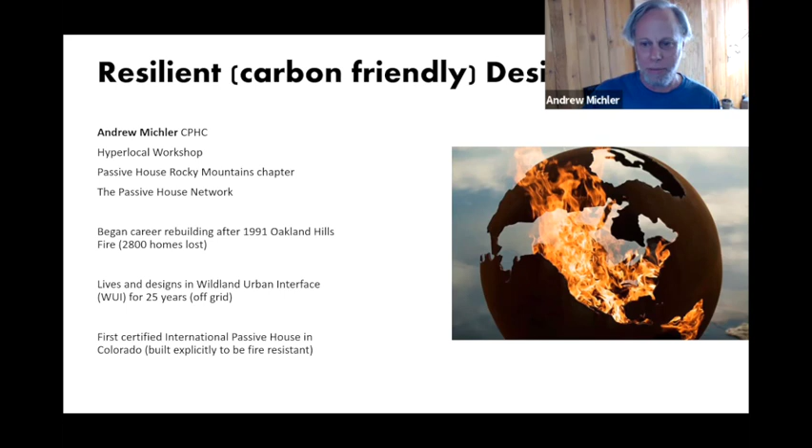Yeah, I do live here. I've been here in Colorado for maybe 26 years, 27 years. I've been off grid for 25 years. And I live out in the foothills, the wildland urban interface, off grid, in Ponderosa Pine Forest. I've been thinking about fire resilience pretty much since 1991 when my family's house burned and we went to refurbish a used house, an existing property. That's when I first learned about building and how important it is, and I've been interested ever since, especially on the fire resilience side.

So tonight I want to start off a little bit about what carbon in buildings is as a reference point to a lot of the conversation we're going to have. This is not an isolated event, this fire, and in fact, Cameron Peak fire came creeping right up to the edge of my property a couple of summers ago, and we're going to see this over and over again. So we really have to think about the built environment in interaction with the greater environment, so to speak. I'll get into Firewise design, which is the main topic tonight, and then talk more about resilience and passive house and how we need to talk about building as a system rather than just as components when we talk about building in 21st century conditions.

And as you probably know by now, Xcel Energy is offering pretty generous rebates for higher performance buildings over code. I'll focus mostly on passive house because that's what I know best. And that also integrates best with this Firewise or resilience context.

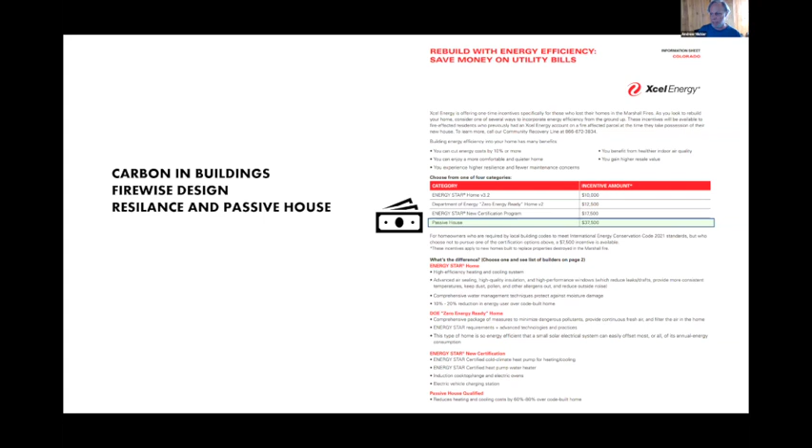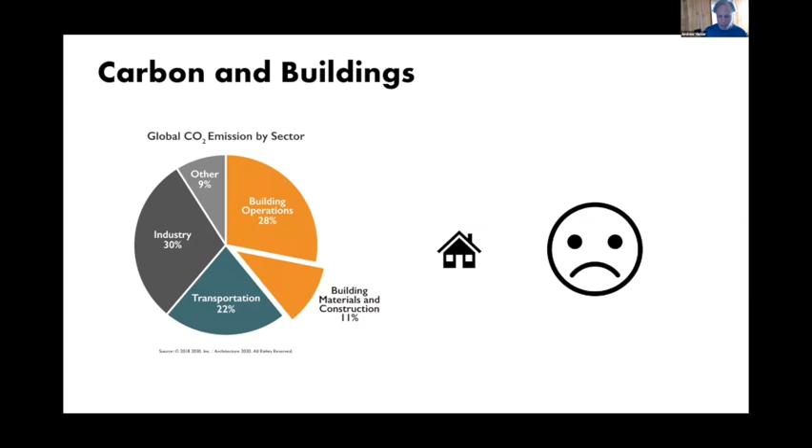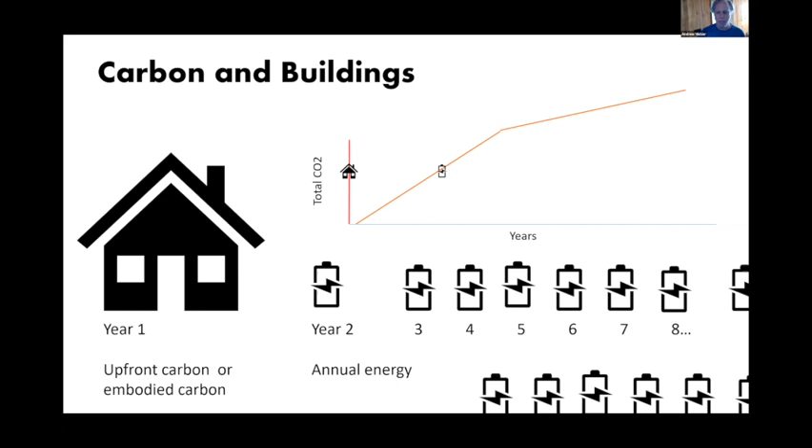And just as a frame of reference on what that means, year one is when most of what we call embodied energy for a building takes place, in the materiality of the construction. And then over the years is when the operational energy, the carbon input, comes from. So even as our grid gets cleaner, it's still a slow transition, a slow ramp to hopefully a zero carbon or low carbon energy infrastructure, but that's going to be generations away, unfortunately. So our main focus now is on the energy side of buildings from that perspective.

So first thing we look at is eliminating fossil fuels on site and then reducing demand for energy in general. That starts with the high performance building envelope. And then reducing demand for methane gas or natural gas upstream, which means we're still using power, but we're using less of it when it's produced by what we call peaker plants or natural gas fed plants.

The all electric home means that heating, cooling, hot water, and even cooking is going to be all electric. And the technologies now are here that are fantastic and are highly subsidized as well by the utilities. Roofs are oriented or built for PV, and you're now thinking about not just use of the building itself, but car charging as that becomes electrified.

But we're building neighborhoods. We should think of our cities or neighborhoods not as giant solar plants, but also as accessible, green, biodiverse living places. So we don't want just to build giant flat roofs for PV. We really want to create more compact housing that can include a diverse, biodiverse environment.

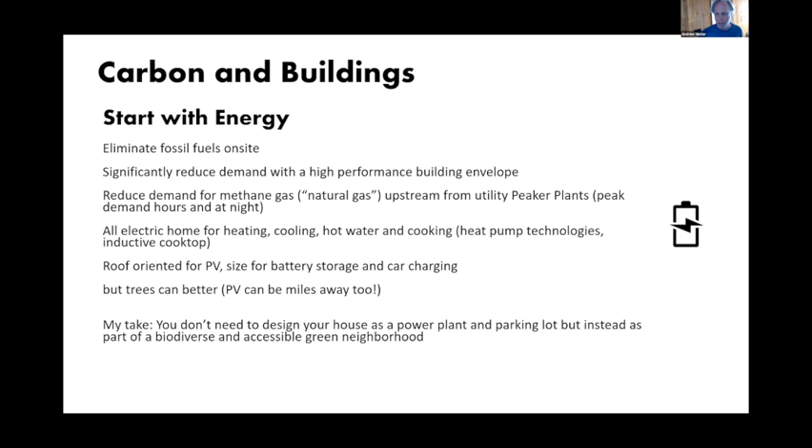In terms of the Firewise home, the interesting perspective I found on this website, Wildfire Today, was that researchers discovered that homes built in 2008 or newer are about 16 percentage points or 40% less likely to be destroyed than 1990 homes experiencing identical wildfire exposure. And that has to do with the change in code over time in specific regions in the country.

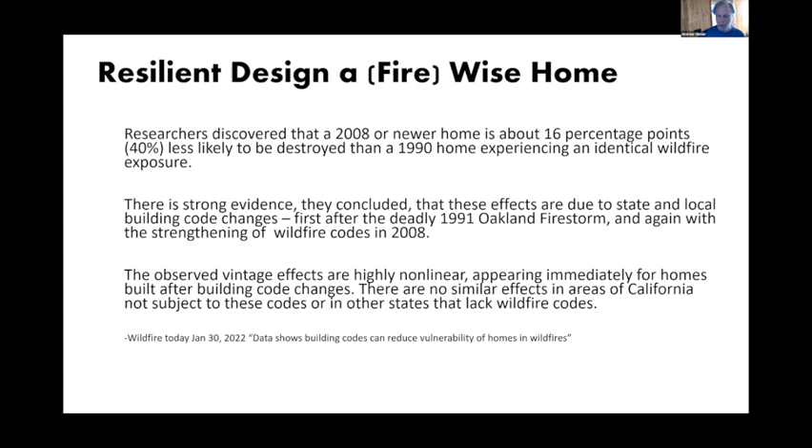I'll talk a little bit about that, but also we should be certainly advocating or looking at the conclusive evidence that fire resilient design is extremely effective and not necessarily more costly than traditional code buildings. And I'll tell you why: exterior fire events are typically not well considered in code.

Usually, just for fire resilience, we're looking at maybe a 5/8 inch drywall between the house and garage, so if there's a fire in the garage, it protects the house. Unfortunately, insulation is usually not fire rated, or not particularly strongly fire rated in the type of insulation you can choose. Smoke alarms, firewall blocking between floors is pretty typical. And now we're seeing often a Class A fire roof used in a lot of areas.

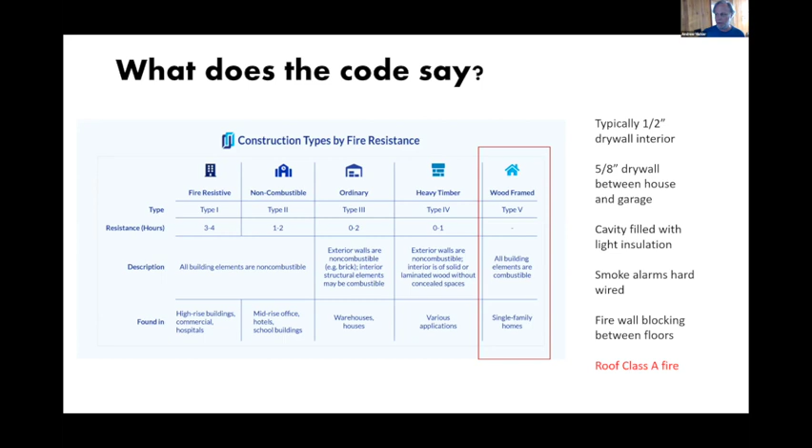But typically, when we're looking at light framed wood construction or single family residential, fire is not a particularly high consideration for code compliance. So it's pretty much on our own how we want to think about how to create fire resilient homes in the future at this point.

And I used this analogy before with the help of Johnny, and I'm going to reuse it again: the idea of thinking like a log. I'm sure most of you have tried to start a campfire or a wood stove fire, and you know the first rule is you don't just throw a log in and put a lighter to it. Usually you start with kindling, and then you build up to the log. Part of that is because of something called the surface area of the materials. It's much easier to start when you have lots more surface area on a given object.

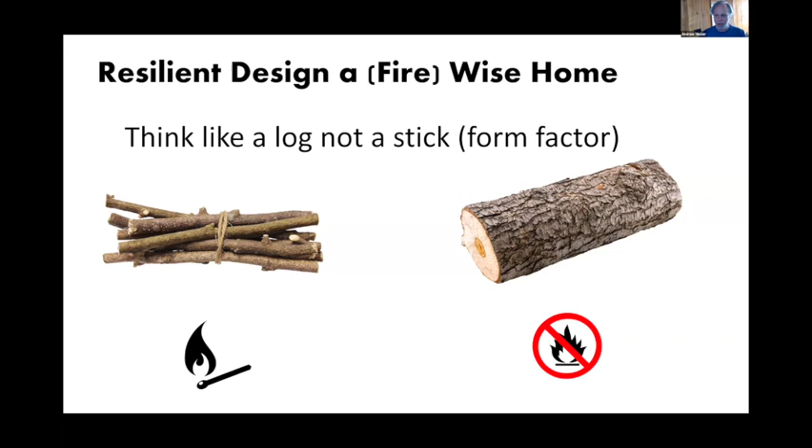So that means we start the design considerations with buildings with a more simplified design. And that includes porches, the vernacularisms of the building as far as portals or corners. All sorts of things can lead to increasing the fire exposure of the building. So simplifying that form greatly improves its fire resilience.

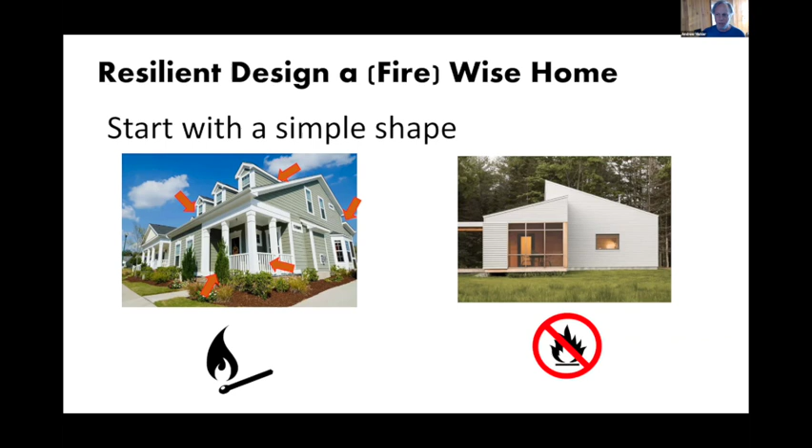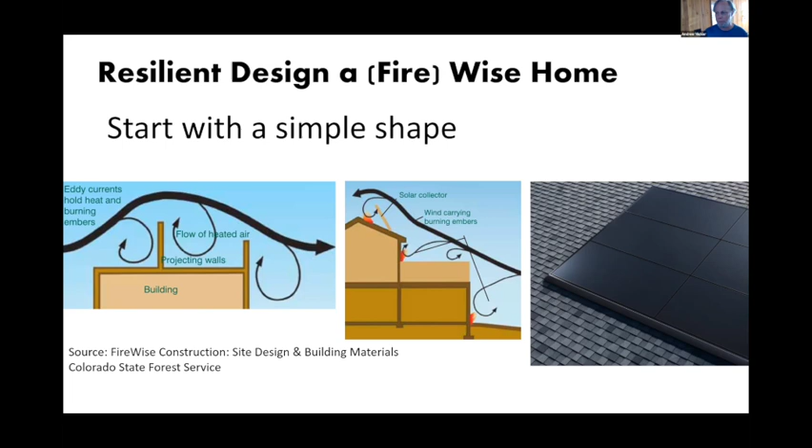And then very broadly, removing materials around the house that can lead fire directly to the structure. Wooden decks, unfortunately; in Colorado, we love to live outside. Wooden decks are a perfect way for a fire to really capture underneath the deck, on top of the deck, and then transition right into the house.

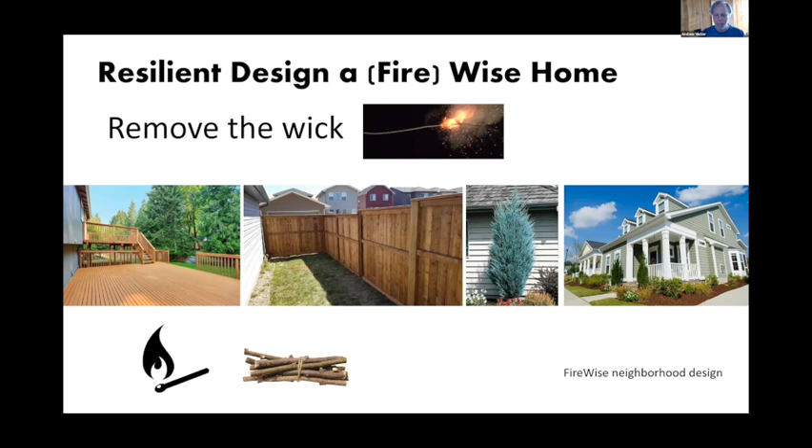Wood fences, landscaping, again, porches, all sorts of little detailing around a house that's combustible. So we call that the home ignition zone. And this is more of a WUI, wildland urban interface kind of construct.

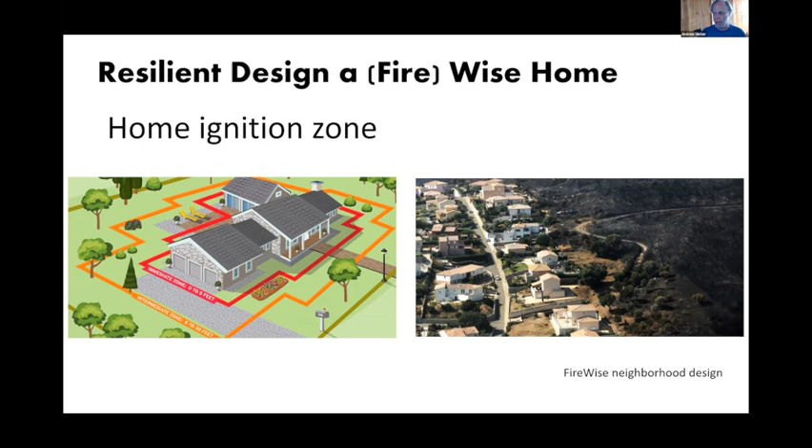This means fire landscaping. The first few feet of your house are most susceptible for fire to start, so hardscaping that, or putting in plantings that won't support fire, is important. Landscaping becomes critical within the next 5 to 10 feet, even 15 feet away, in a fire event. That's something you want to be doing—selective planting, keeping grass well kept, cutting it when it's dry, and having good overall design at the interface between the greater area around you and your dwelling.

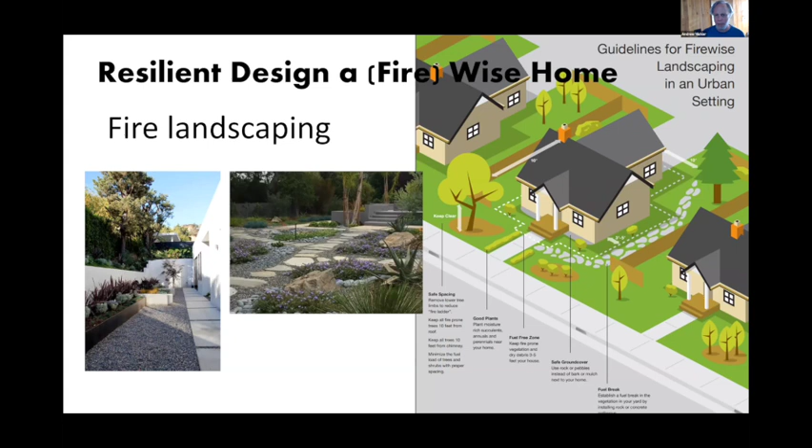When it comes to the dwelling itself, mind the gaps. Often the first thing that comes with fires is the ember front, and those embers are pretty sneaky—they'll go wherever the wind blows, which can get into places like eaves or unprotected crawl spaces. So the first place we look to within the building itself is protecting eaves. Unfortunately, code hasn't been helpful for eave design at this point. We advocate for a fully insulated or fully encapsulated roofing system to eliminate the possibility of hot air and embers getting in. There are other issues if it's not properly detailed, like moisture control, but in the case of fire, eave design is the first place we look.

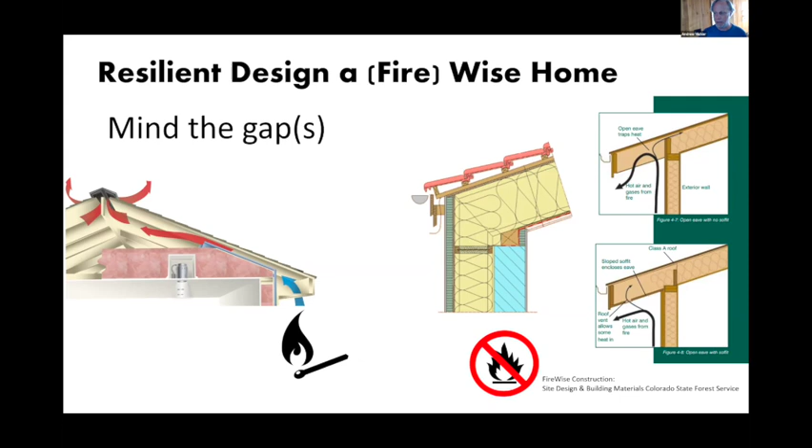Then windows—the second thing that comes is the large heat front. We've seen this in the mountains over and over, where people build a concrete house or a real fire resilient structure, but the windows were the first thing to go in a fire front. High radiant heat can expand the glass and crack it. I've heard numbers like 3 to 5 minutes of high heat can crack a single pane of glass, so once you have two panes, your house is essentially open to the entire outside environment with a completely unprotected interior. We're looking at triple pane glass, which is also 3-way tempered, typically much higher performing in a fire event than double pane glass. That also includes how the frame is built—tempered glass with an aluminum frame on the exterior can stay more rigid than, say, a vinyl frame.

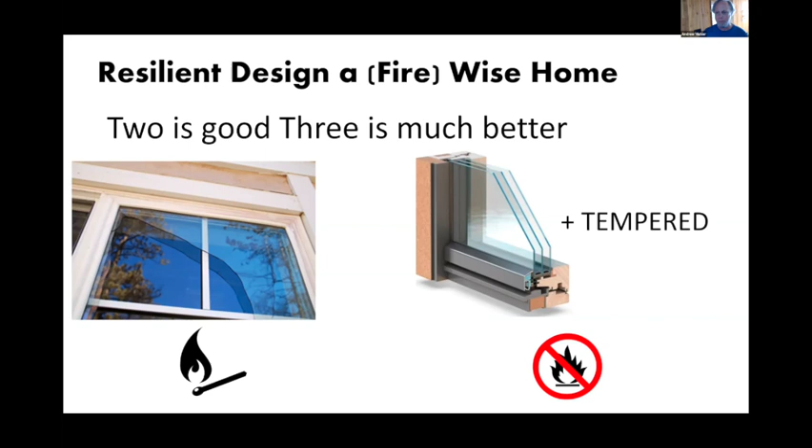Once the fire is around the house, having fire resilient materials is critical. Sadly, it kind of breaks my heart that wood exteriors are becoming less prominent out here in the West, because you can imagine how easy it is to start a cedar shake wood siding on fire. You certainly can't do it on your roof, but even wood can withstand radiant heat quite well—it just can't stand direct heat or flames very well. The good news is there are a ton of options now, either mimicking wood or other vernaculars, maybe more modern or traditional, or a mix. We have a good variety of Class A materials, from steel roofs to stuccos, brick, and fiber cement. Cement boards are becoming quite popular, and there are even architectural cement boards that look quite modern, not like a traditional lap, plus stones and other options. When redesigning a house, there's a great experience in discovering these materials, and the cost effectiveness is pretty good now, especially with fiber cement products.

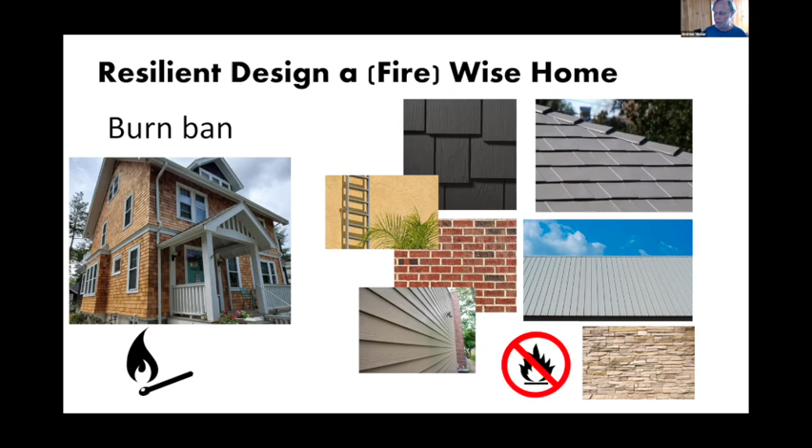But it's more than skin deep—we should look at how the walls are assembled as well. This means starting with foam. Foam, even with what they call fire resilient agents in them, still tends to burn extremely well.

Spray foams and board foams are used ubiquitously, both in normal code-built houses and quote-unquote high performance houses. So we're looking at eliminating them within the building structure.

Unfortunately, fiberglass is the most popular of all insulation materials, but it's typically quite airy. It lets air through the material itself. So it doesn't take much to get a fire going inside of a cavity with fiberglass insulation, and for it to spread as a result.

So the two more preferred measures to look at are mineral wool board and mineral wool batt, which is becoming much more mainstream now. Mineral wool is very popular because it has a high R value per inch relative to fiberglass, but it's also extremely fire resilient, almost to the point of being fireproof.

And surprisingly, cellulose insulation, which is a recycled paper product, what that does is called dense packed. So it doesn't allow air through the cavity, and also has a fire retardant that can smolder but doesn't support flame.

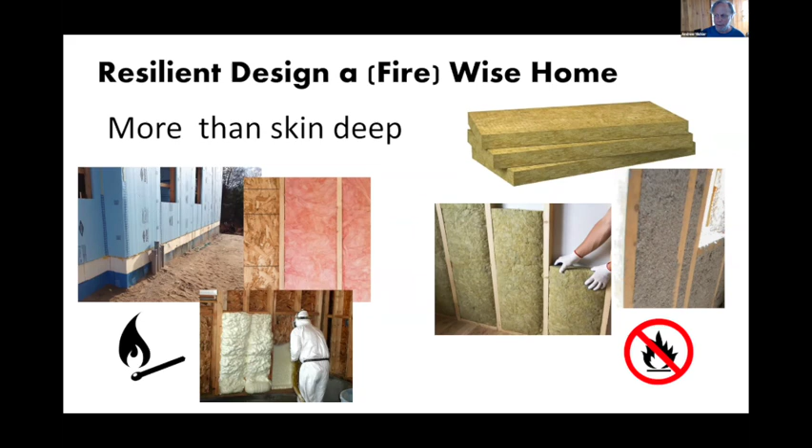So I'll go quickly into my own house as an example of what a highly fire resilient assembly might look like. And I'm going to start from the outside in.

Even though it looks like wood, this is just Hardie Board brand material, so this is fiber cement. There's a little bit of wood accent right there. I threw some rock out in front—I should definitely trim the grass—but that first barrier is to keep fire embers from having any place to perch, and for very little material to actually be able to burn.

Underneath that, of course, I have steel in the back of the house as well. Underneath that is a mineral wool board, and that's the exterior insulation material. 2.5 inches of that makes a completely fireproof boundary zone, essentially, for any fire that catches right next to the house.

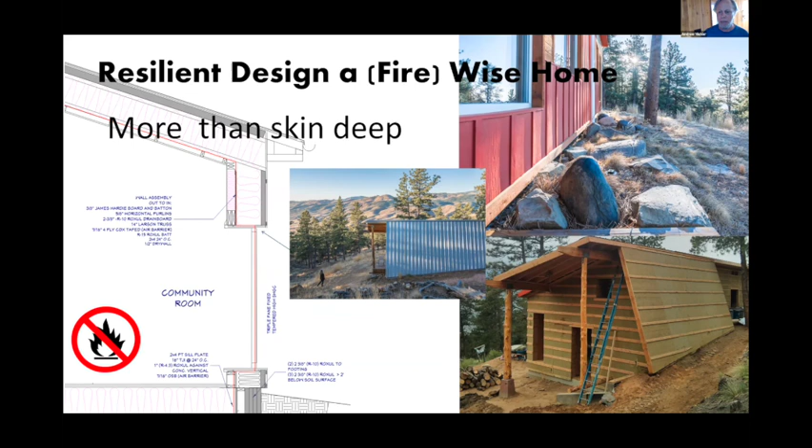Inside of that is a substantial amount of cellulose insulation, and then a structural wall, which has a mineral wool batt in it. So this is a very fire resilient assembly, and then the triple windows, and then protected frames for the windows.

So that's my particular approach that I took for my house, and there's lots of different ways to look at assemblies.

I wanted to also emphasize that when we look at the idea of resilient design, we also want to talk about surviving fire events, even if they don't necessarily go right up to our doorstep, but the air quality issues and especially smoke issues, which can be a substantial problem both for health and essentially contaminating the house to the point where it's unlivable, as unfortunately a lot of people have found out.

So we're also looking at the idea of air pollutants in general. Ozone, as you unfortunately probably know, Colorado's ozone levels have been defined as extreme last summer, and it's not getting better unfortunately. We're seeing a lot of smoke from just the west, from fire events all the way from Canada, Vancouver, all the way to Southern California, zeroing in right into the Front Range here.

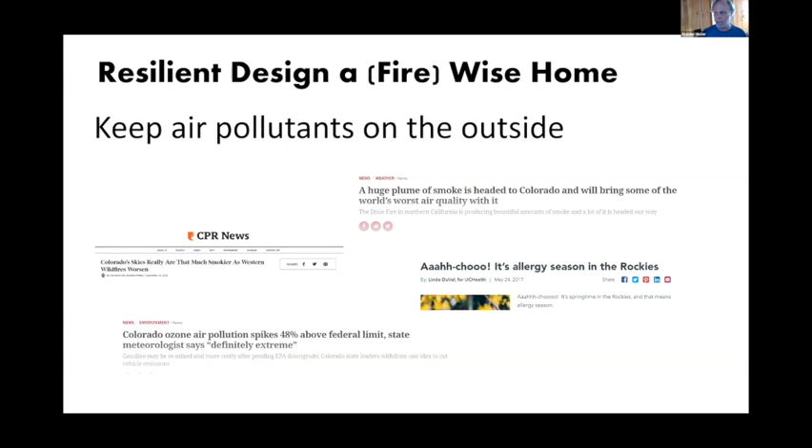So we're seeing this as a very typical event, air pollution on the exterior being a condition for resilient design. That means we need to look at, best case scenario, the building envelope as an airtight envelope. Right now code has buildings typically at 3 air changes per hour, tested using what we call a blower door. But we want to be actually a lot more airtight than that—that's completely insufficient for keeping pollutants out. I'll show you a graph of why that is.

So we'd like to look at dedicated air barriers within the building itself, and this goes hand in hand with some other aspects which I'll get into later. Once you get a very tight building envelope, you're going to want to look at a dedicated ventilation, fresh air system. So we're taking this 'build it tight and ventilate right' concept to its logical conclusion.

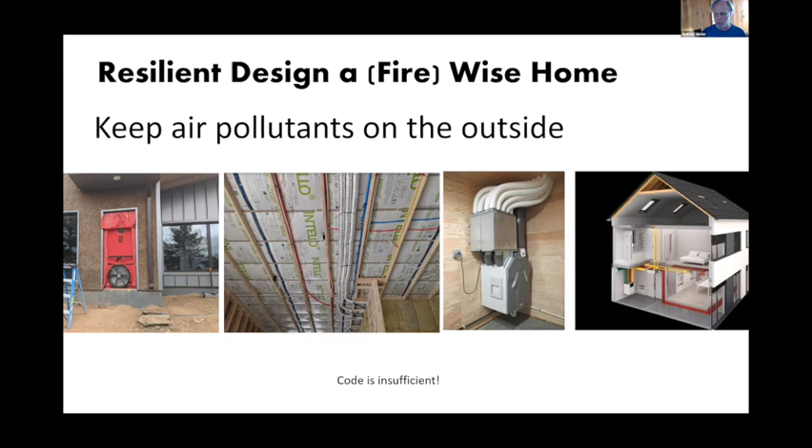As we know, in Australia's Victoria area, they've been going through extreme bushfires in the past few years, and a lot of homes have burned. So they're looking more and more at adaptive design for fire resilient conditions, and they found out that passive house airtightness is one of the key ingredients now that they're recommending for fire resilient buildings.

There's a lot of other detailing that they're taking into account that's more of a wildfire condition in a backcountry environment, but the airtightness is kind of a universal for all of us now.

And that's going to jump into me getting a little into more of the passive house side. I've been thinking and working in passive house for a long time, so I use that pretty much as a reference. And I'm using the reference in this talk that we need to look at buildings as systems and not as individual components. Components don't necessarily add up to a totally resilient building condition. So using passive house methodologies is a framework to look at the idea of resilience as a system.

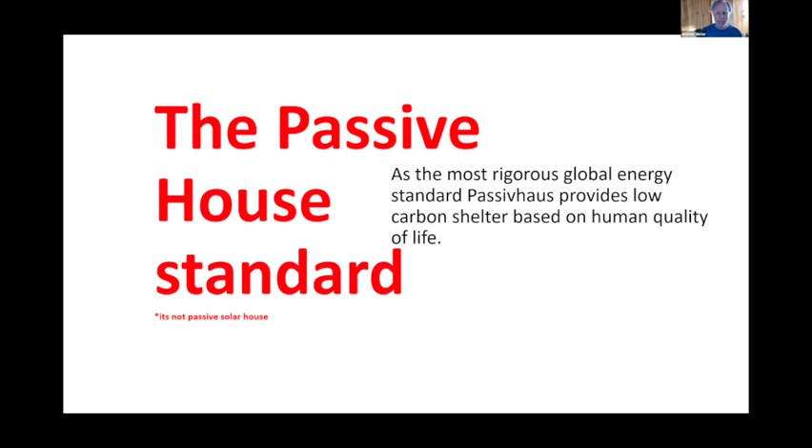In terms of passive house, what we're talking about is 21st century concepts around what shelter is. In the 19th century, we just pushed a lot of BTUs through a building that had minimal insulation. In the 20th century, we added a bit more insulation, but recognized we had to put in lots more heating and cooling equipment. In fact, we probably wouldn't live or build the way we do now without air conditioning - we've been subsidized by complex equipment and energy as a result. So in the 21st century, we're looking at envelope design and improving the envelope, both in the amount of insulation, the level of passive solar, and the fresh air systems.

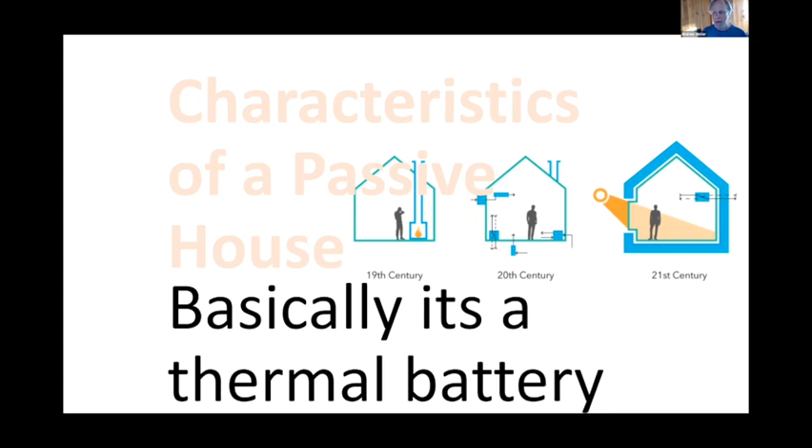So you can think of it as a thermal battery. Here's a quick idea of what the outcomes are for passive house compared to what a code building is, as far as energy input and losses for a building. We're reducing the amount of losses so we can deeply reduce the amount of energy input compared to even a low energy house, as the Passive House Institute would refer to it.

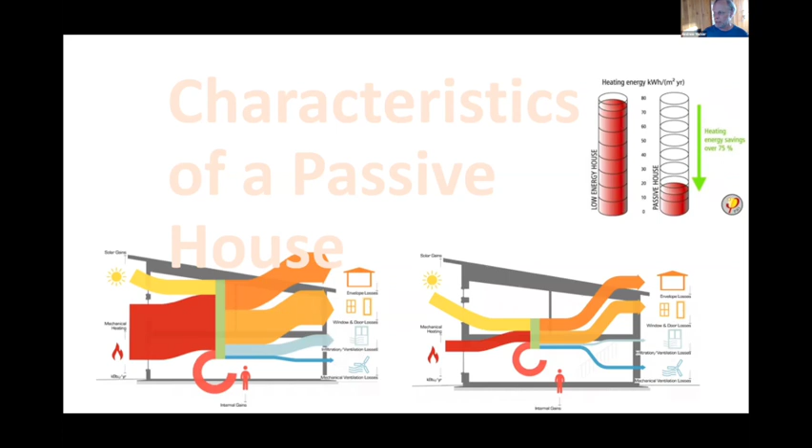I'll start off with a personal story on why this is important in terms of resilience. Something called the Passive House Challenge was set off about a year and a half ago. It was a strange coincidence that I had a couple of mixed artists, both visual and musicians, writing an album in my house back when we had that big cold front, the famous one that wiped Texas out pretty much. For us, that was the coldest I've ever been.

I think it was -19 for a few days and didn't get above 0 for at least a week, Fahrenheit. And sure enough, my pipes froze coming into the house. The house didn't freeze, but the pipes coming into the house froze. And the genius I was had to use my hot water heater as the heating source for the passive house. So I ended up not having a heating source. And these guys trying to write an album in the house had no heating during this record Arctic front, at least for me.

And for them, they never complained. Finally I said, so how are you guys doing? They said, oh no, it's a little bit chilly, but we're doing great. It was 57 degrees, I think, the lowest it ever got in that house with no heating for about 6 days. So to me, that's the epitome of resilience - a building that can be quite livable, and even borderline a little uncomfortable, but very reasonable, given such an extreme event, both the cold and not having heating during that cold event.

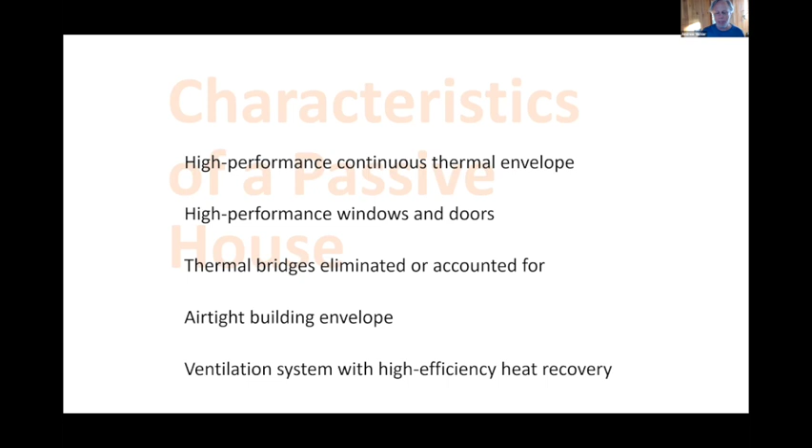So the characteristics of what we're looking for to get to that level of resilience with extreme weather events are: the high performance continuous thermal envelope, high performance windows and doors, and thermal bridges eliminated. Thermal bridging is the way heat escapes through materials connected from the outside to the inside that are conductive - that can be steel, wood, things like that. Even the frame of your windows can be a substantial heat loss. An airtight building envelope, as I talked about, and then the ventilation system with heat recovery. These are the core considerations of this type of building process.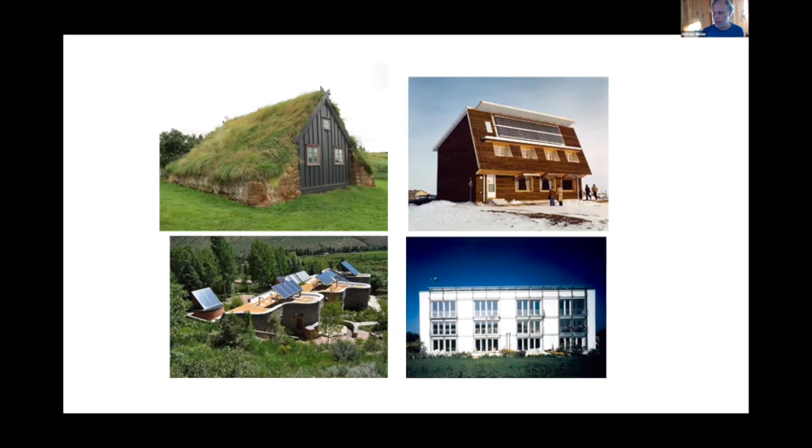Some early examples of where Passive House started from, with the first original Passive House completed in 1991, I believe, in the lower right-hand side.

I threw this slide in to show that they're everywhere and at every kind of scale. So it's nothing exotic, it's not particularly strange. It's designed for all sorts of different environments.

I'm going to circle back and talk about that form factor we talked about earlier, about fire resilience - think like a log, that's called the form factor. It's also something we consider in Passive House as the heat loss form factor. You can imagine when you have mittens where your fingers are completely covered, you're reducing the surface area from your hands, so they're much less susceptible to cold environments. Once you have a glove that's just fingers, each finger is going to radiate more surface area and be able to radiate more heat. And then thermal bridging is where there's no insulation and we're directly connected to the outdoor environment, which is not good.

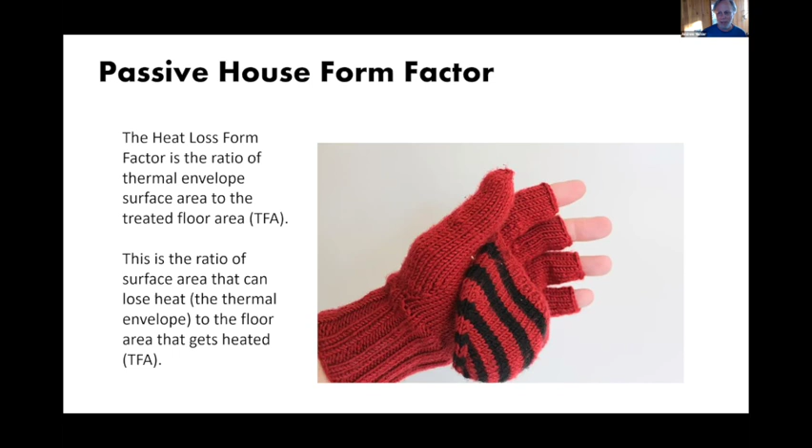Here's an example of what that can look like from a raw calculation from a heat loss point of view. It's a little sciencey, but this is how we start designing these resilient, high performance homes at the very beginning - every time we increase the surface area, we need to also increase the level of insulation. We can do that through parametric design and energy modeling.

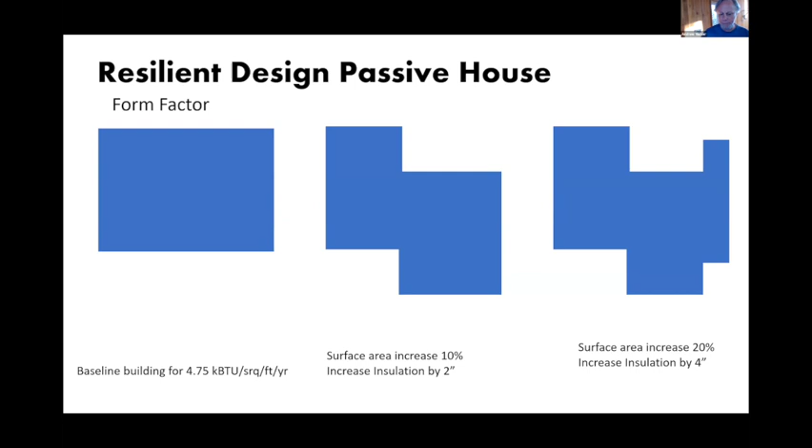The air tightness side is where we want a dedicated air barrier through the building, and then we can test that. Typically for code, we test air tightness after the building is built - that's crazy, we shouldn't test things after you do them, you should test them while you're building them. So often with a dedicated air barrier, we can also test the buildings to see how airtight they are during construction, so we don't bury these problems.

These problems aren't just about particulates getting into the building and reducing air quality inside the home, but they also protect from vapor and moisture coming from the outside into the inside, condensing on a cold surface potentially and rotting the house from the inside out, or from vapor from inside the house - the high humidity inside wants to go to the outside walls. So it's a way to protect against that as well.

In this case, we're looking at 0.36 air changes per hour. That's good - maybe 5 to 6 times, actually 10 times more airtight than building code. And the more airtight you are, the better off you are, to be honest.

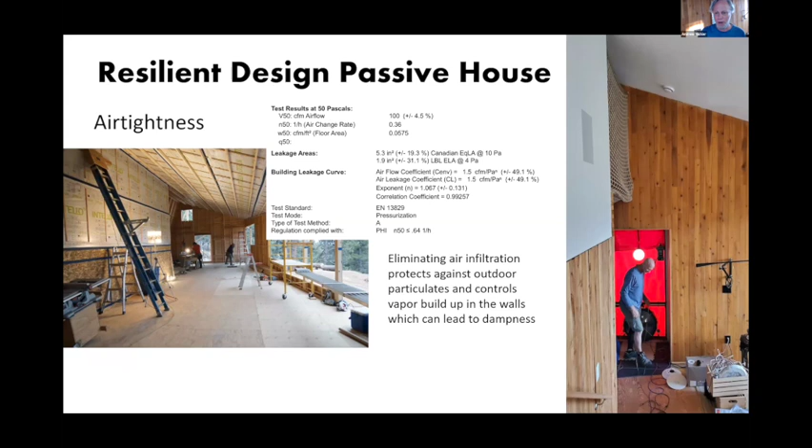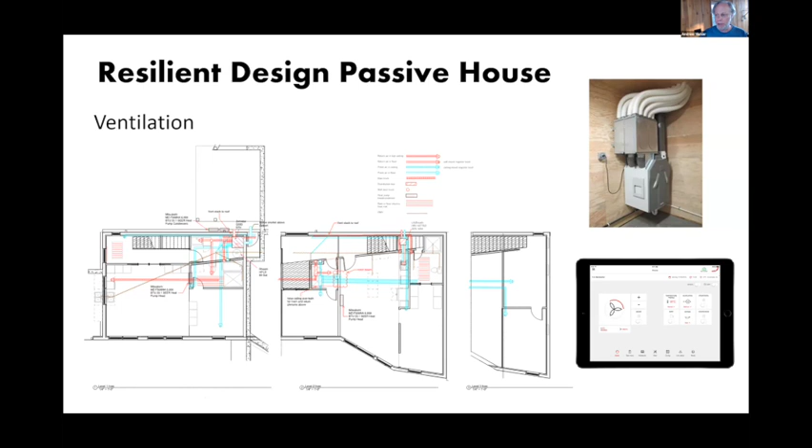On the ventilation side, we look at - code is a little bit cagey, they do require ventilation but don't often require balanced ventilation, and sometimes that ventilation is mixed with other systems, so it's not particularly well balanced. We like to look at well-balanced ventilation systems using energy recovery, heat recovery ventilation systems. That gives us the opportunity to control how air is exchanged from the building, so we can extract air from pollution sources like cooking or bathrooms and put fresh air right into bedrooms and living areas.

The blue is the outside particulate matter, the red is a leaky house interior during that smoke event, and the passive house is the yellow. The passive house is maybe 30 or 40% better than the leaky house, but it's still letting in particulates using just a standard filtration system.

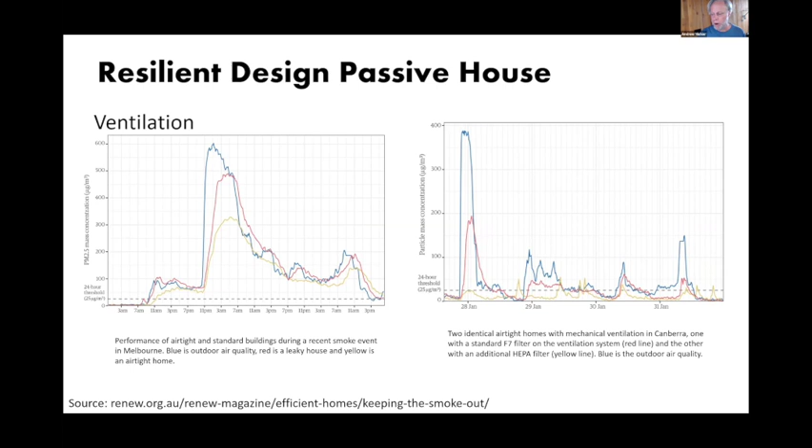Jumping to the energy side for the resilience side of it, for passive house at least, I'm going to do a quick uptick because you get $37,000 from Xcel for rebuilding. So I want to just quickly talk about how passive house works in that context.

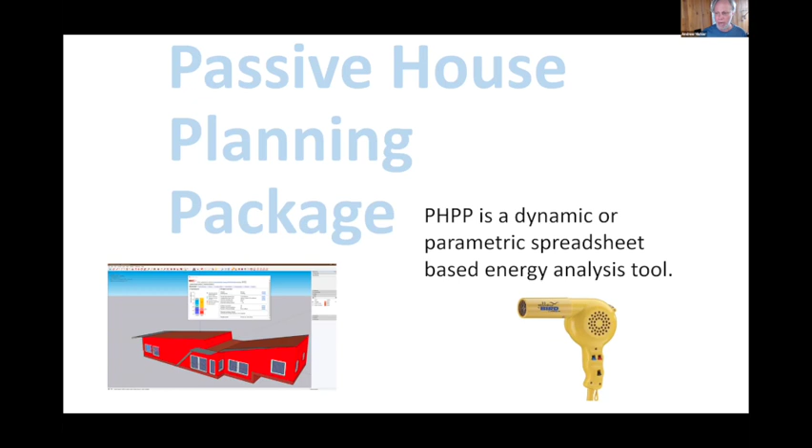It starts off with an energy modeling software called the PHPP, and that accounts for building losses, air exchanges, and all the other things. The intent is getting the base load heating down to essentially the size of what a hairdryer would be for a typical residential house, let's say 2,000 square feet or less.

Then there's certification levels, and to get that rebate, you'll need to be certified. For passive house, there's the classic, plus, and premium. Classic is if you don't use renewables. Plus is adding renewables to what we consider a net zero building—a complicated topic, but a net zero concept. Premium would be if you wanted to also extrapolate renewable energies for your neighbors, for transportation, for your vehicle plug-in, things like that, and sizing that accordingly.

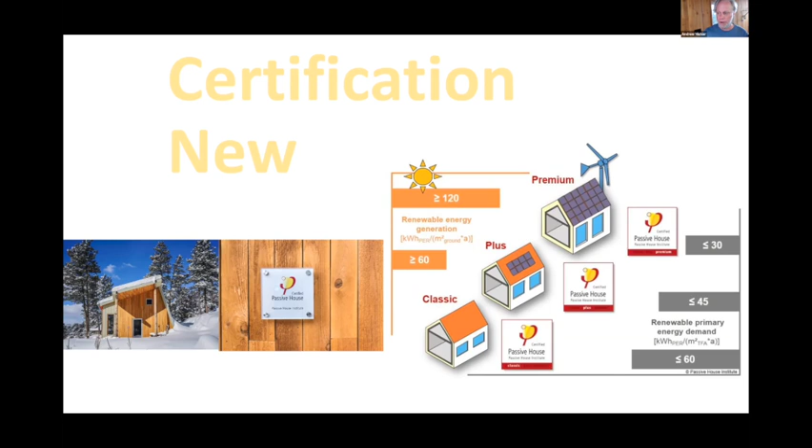This is all done through intensive calculations within that very elaborate energy modeling process.

In terms of the team in passive house, we have what we call a certified passive house designer or consultant, and they'll be the architect or building designer. The consultant can either be the designer or somebody who works with the designer. The builders have a tradesperson's certification, and they are the ones getting tested on site and implementing all these measures. But they can't build something that's not designed for, say, an airtight environment in the first place, so that interaction between the architect and the builder is critical.

As owners, we're pretty much the ones cheerleading this and making sure everybody's up to task and keeping their part of that process front and center. Then there's a certifier for passive houses, making sure everything's done correctly, documented correctly, tested correctly. There's also commissioning specialists for the ventilation system and the airtightness system—those are actually commissioned or tested on site, so you know what you're getting. And sometimes there's specialty consultants involved, especially around atypical building systems for thermal bridging and thermodynamic analysis. It can get quite complicated quite quickly with more complex buildings.

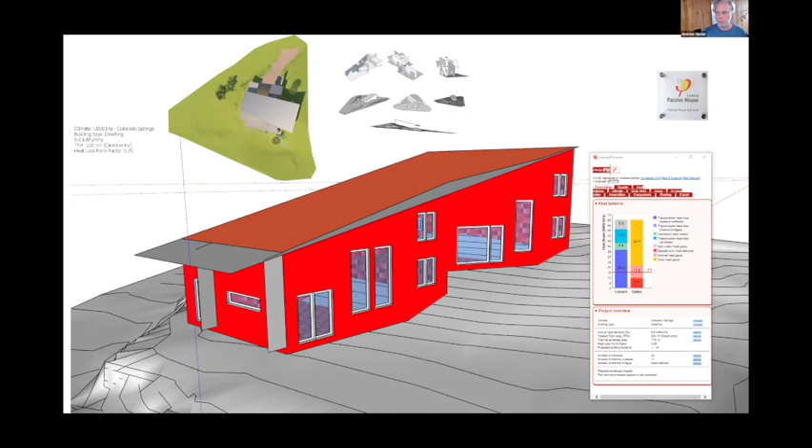For the fire protection of the house itself, we have metal roofs, and we're using a fiber cement board to mimic lap siding, like a vertical lap siding on the exterior.

The simplicity of shape makes it much more simple. Hardscape is going to be like a concrete patio down below, and a gravel drive surrounding the house. And then the decking is of non-combustible materials on top. The house is also going to be made from prefabricated panels from a company called Collective Carpentry up in Canada. We hope to have them set in late April.

So this is basically the walls of the building, and the roof will be built in a factory and then set on site. So we hope that we can weatherize the house within just a few days, for instance. So it's something new for us, but something we want to see a lot more of for the quality control aspect of it.

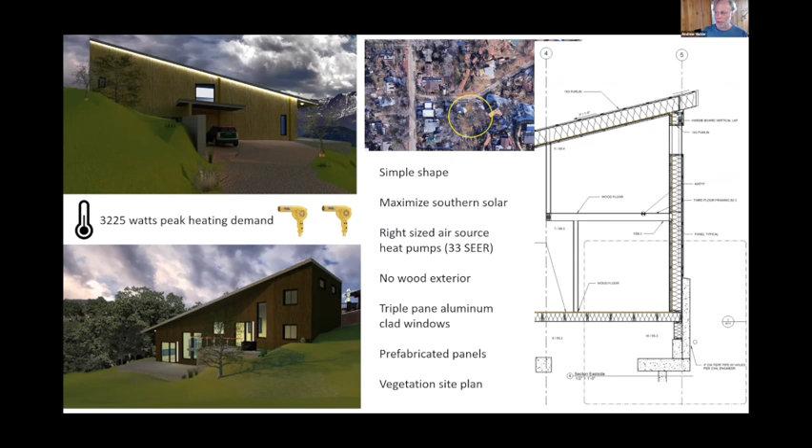And then there's a lot of talk about the net zero part of this debate, or the concepts around what we think of as green building, what Xcel Energy needs to target for their production of energy for their long-term planning. And so what they really want to see is a relationship between the energy consumed and the energy produced. So energy produced means the solar panels on your roof, for instance.

You're going to make peak energy during the summertime, but in the wintertime, for a typical house, you're going to consume quite a bit of energy in this particular climate, especially in Colorado. Even if we put heat pumps into the buildings, we go all electric, all of a sudden we're going to have a significant demand for power when we can't produce it with renewable energy. So that means we still have to use natural gas, even coal plants, right? So we're trying to get out of that mindset. So we want to flatten that curve.

So the first part is to reduce the energy demand. So there's still a gap, unfortunately, in the wintertime at this point. But as far as energy production, that means we can also reduce the energy production for the buildings themselves. And if you want to produce more energy for the buildings in terms of net zero, we can either use less solar panels on your roof on site, or you can put more solar panels on, as we talked about, for your plug-in electric car or your electric motor, whatever else you want to do with it. So we're reducing that gap substantially.

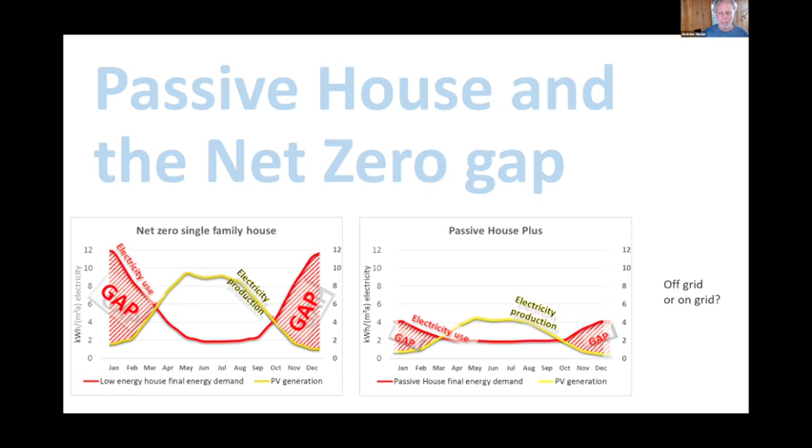And go back to where we began, from that large scale concept of living on a resilient planet, let's call it, how our buildings connect with that in the energy relationship. Ultimately, we want to look at something called the primary energy renewable, how we can source energy not just through immediate use, but through time of use, through seasons, so that our buildings are responsive for when the renewables are produced and stored to when we consume them at the building site in our homes.

So we look at the short-term storage solutions that connect with immediate renewable energy, and then more long-term solutions that can be complex. A lot of these are a long way out in technology, but they will be coming online. So we're almost talking about future-proofing our houses now for future primary energy renewable systems that will be slowly integrated into the grid in the future.

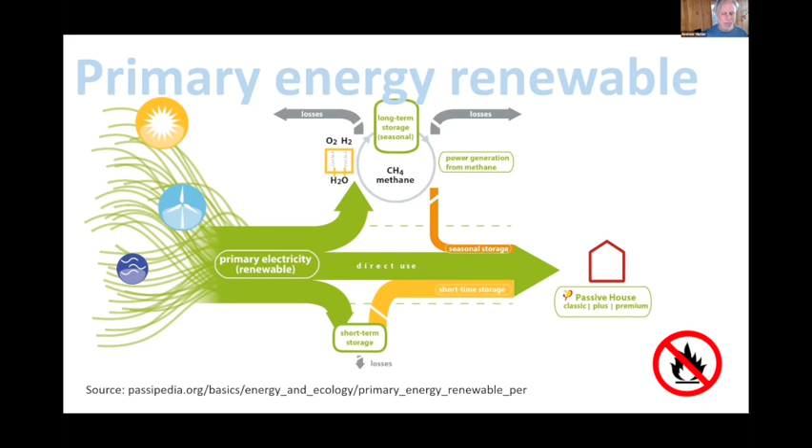So, for me, especially during this wartime situation, if you look at Europe with what they're looking at for gas, when we look at Colorado, especially around fracking, air pollution, we need to just eliminate our dependence on fossil fuels as soon as possible. And gas prices, the list goes on and on for what we're seeing, immediate negative things that are happening to us personally, and more globally as well. It's really hitting us in the face at this point. So the idea of decarbonizing is as much for peace as it is for anything else.

I'm going to throw out some resources. I know there's a lot of emphasis on the passive house within this talk, but I want to re-emphasize the idea of thinking of a building as a system. When it comes to resilient design, it's not just about electrifying our homes, but looking at the total environmental conditions that we're building through a high performance envelope and equipment within the building itself. And that's a design problem. It's a construction issue, and it's a QA issue. It's something that we need to be able to test during and after the process.

So here's some resources. I'm part of the Passive House Rocky Mountains group. We'll be working with Colorado Green Building Guild, I hope, in the future to provide more in-depth information on a lot of these topics. And we'll also be providing trainings for tradespeople and for designers as well. And then I'm part of Hyperlocal Workshop and principal of that, do lots of passive house projects in Colorado and around the world, I should say around the States.